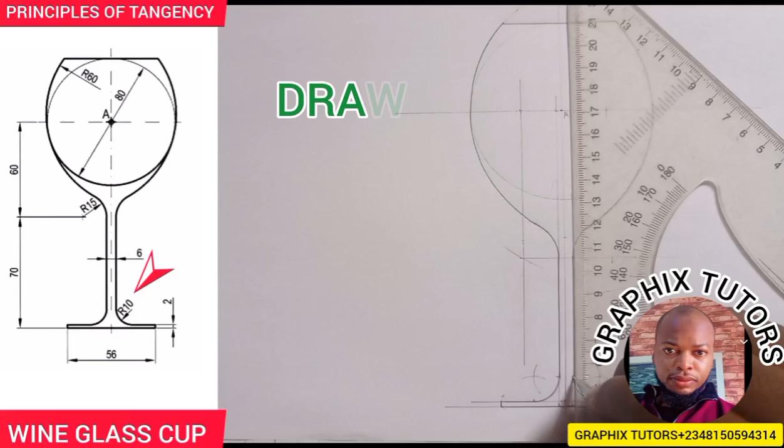If you look at the left hand side of the screen, you see a figure there, and that is a wine glass. We're told to reproduce this given figure using the principles of tangency. So first of all, I'll locate a center that is very visible, and the center I'm seeing there is center A.

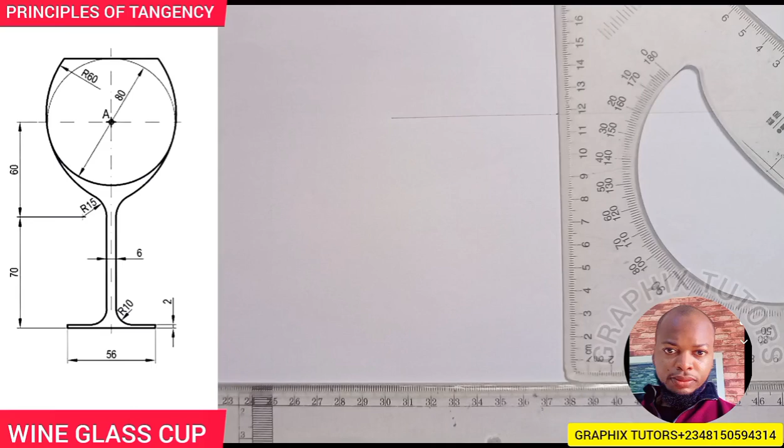So what I'll do is draw my horizontal line this way, and also draw my vertical line this way. Let me take it downward finally. Now this is where my point A will be.

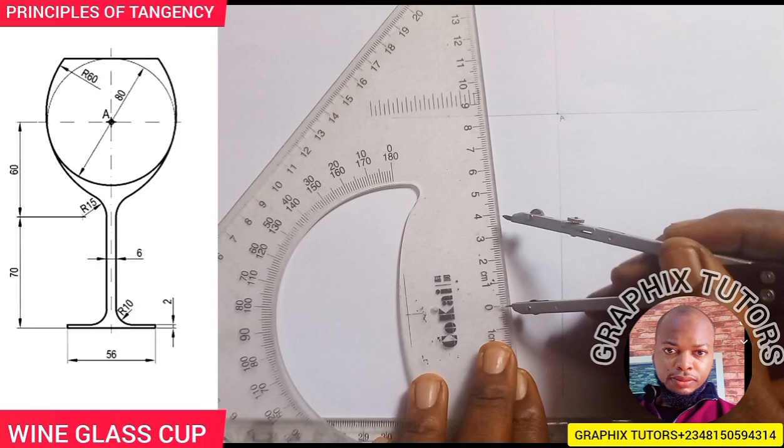Now the diameter of that circle my arrow is pointing to is given to be 80. So I'll use the radius, which is half of the diameter, and that is 40. I'm going to place it on point A, then draw a circle, as a point line first, so it will be easily visible for you to see.

The next thing we're going to do here is the other arc, tangential to the side of the circle my arrow is touching. This arc has a radius of 60. So I'm going to measure 60 on my meter rule: 0 to 6 is 60.

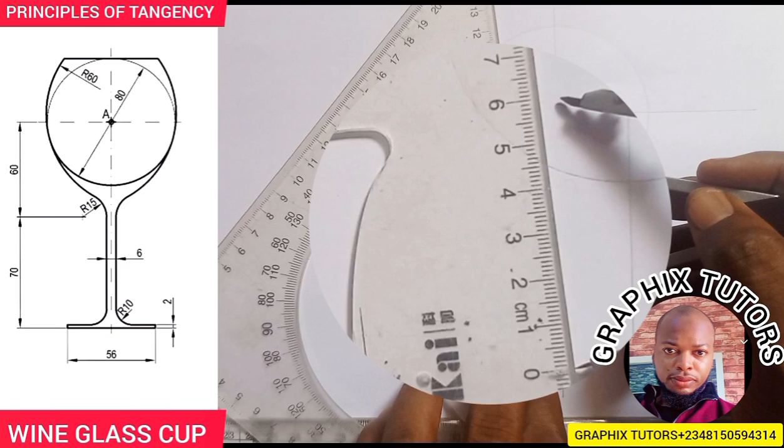I'll place it at this point, where it's tangential here, then strike an arc. So where I strike the arc, I'll take it back to that point. Then I'm going to draw my semi and then my arc this way, touching this way. I'll come here also.

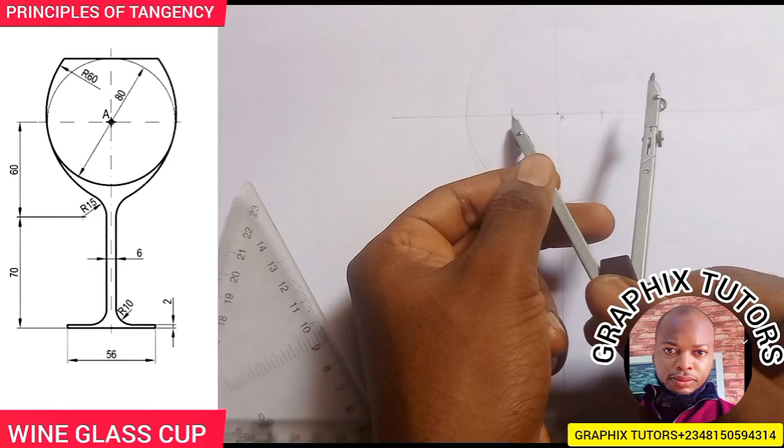I'll do the same thing from this point. I'll mark here, take my compass at that point with the same radius, since it is symmetrical. Then I'll do the same thing too.

Now what I will do next is close the top of it, since it is closed, tangential. From here I'll thicken it.

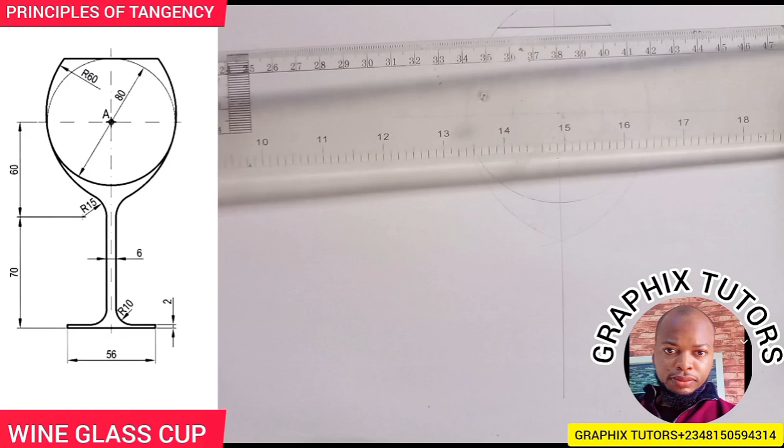If you look closely, there's a thickness of 6 millimeters displayed here between the base of the leg of the wine glass. So what I would also do is, from this point here straight down is given to be 130, which is 60 plus 70.

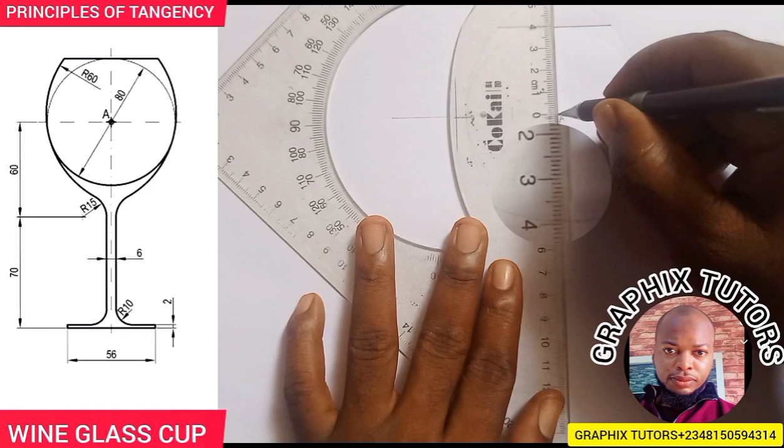So I'm going to measure 130 from that point. From 0 here to 130. At this point, I'm going to now draw my horizontal line there. That's the lowest point there, and I'll bring this to touch it too.

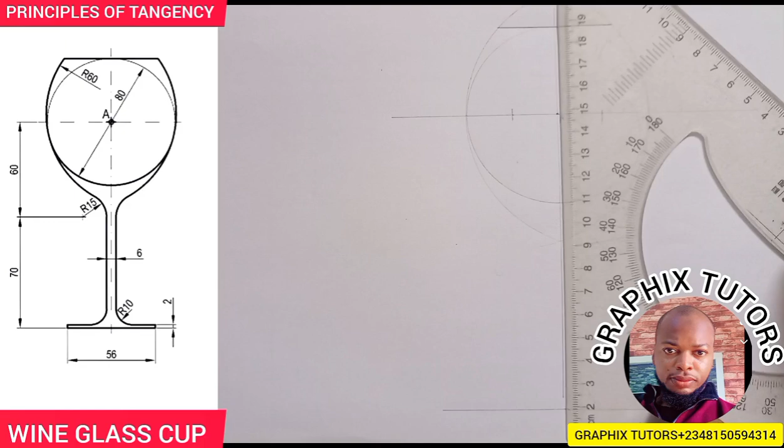From that point, I'll now measure a thickness of 3 at both sides. So this is 0, then 0, 1, 2, 3 at this point, and 0, 1, 2, 3 at this point, altogether making 6. So I'm going to project it upward in this manner, using a faint line.

Now the next thing is where this line is meeting, at this point here. Since that arc you're seeing is going in, it means the circle is external. So I'm going to add the radiuses: the radius of this, which is 60, plus the radius of this, which is 15. So 60 plus 15, that will give us what?

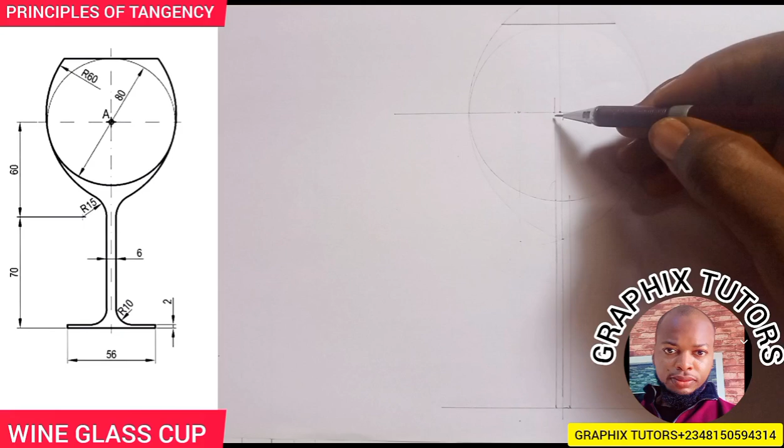75. That's 60 plus what? Plus 15 will give us 75. So what I'm going to do first is, after you've drawn this line, where the line intersects here, you now measure a radius of what? Radius of 15.

As you can see, that radius of 15 you're going to measure it, right? So this is 15 here. Then you drag it down. You drag it down in this fashion.

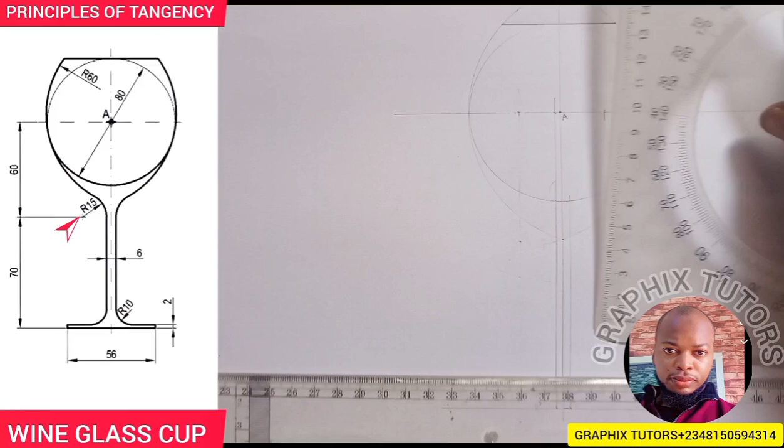Now remember that this arc you see, this is the center of the arc, because from here we got this, right? And you add that arc. Since that arc, this one here, is going in, so you add 15 plus 60, and that'll give us what? 75.

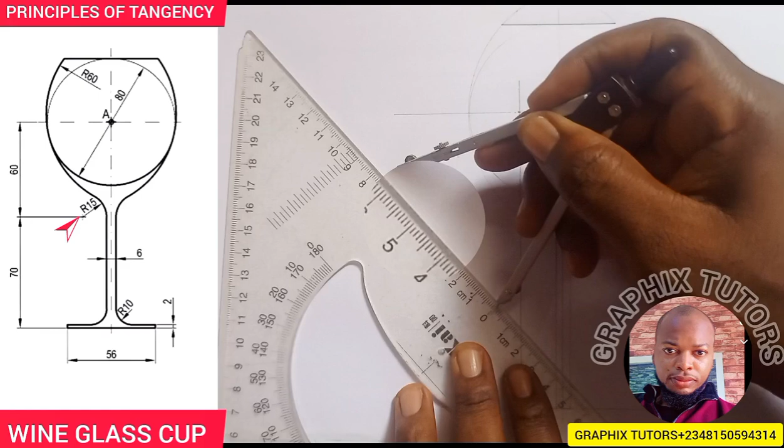So if I measure 75 on my meter rule, 0 to 75 here, right? I'll come to this center here. I'm going to strike an arc, so the arc is meeting at this point here. So it's from this arc I am going to get the fillet that will connect these two together.

You have to be very careful. Can you see that? So I'm going to thicken it out now, so you see what I'm talking about. Can you see that? Now it's remaining the other one.

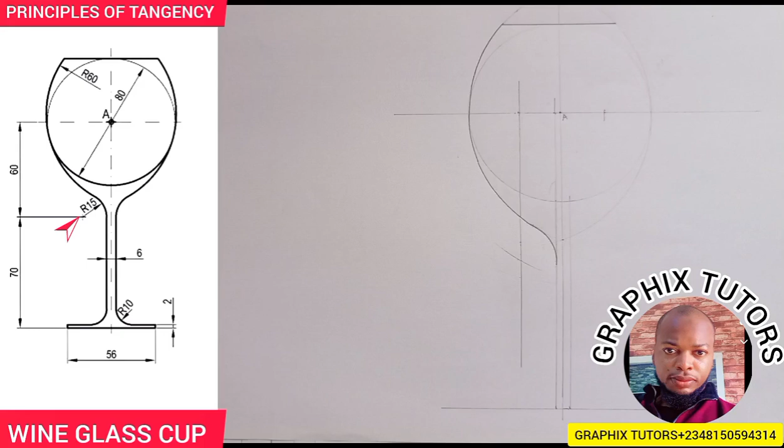So what I'll simply do here, I can just take my instrument here, then I'll just strike an arc here, place it from this point to this point, come here and mark here. So it's from this point you're going to get this arc.

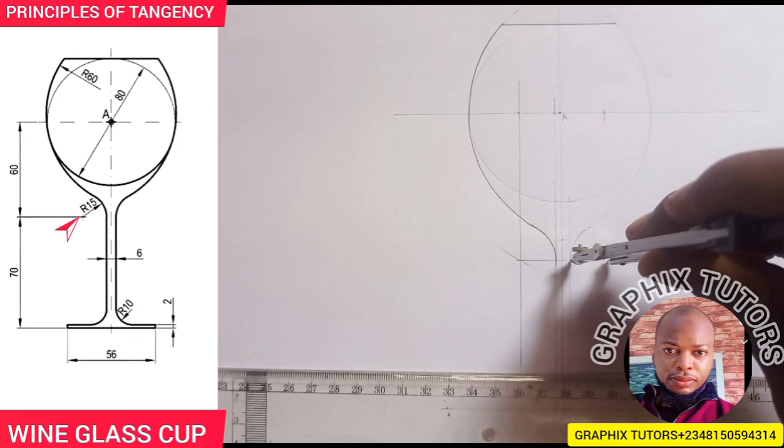Now you will now thicken from here to here also. Now you've done that. Now the next one is the thickness here. You can see it's given to be 2 millimeters. So you just measure 2 millimeters from here, from 0 to 2 here.

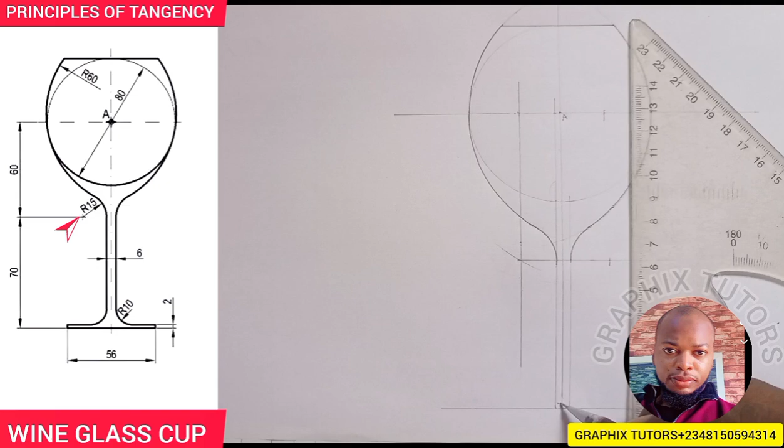Can you see that? This is 0 to 2. And you draw your horizontal line across that point. Then aside that, the length here is given to be 56. So I'm going to measure 56, that is 28 to both sides from this center line here.

So 0, 28, 0, 28. Can you see that? And I'm going to close it up. Close it up. Yeah, close it down here up to.

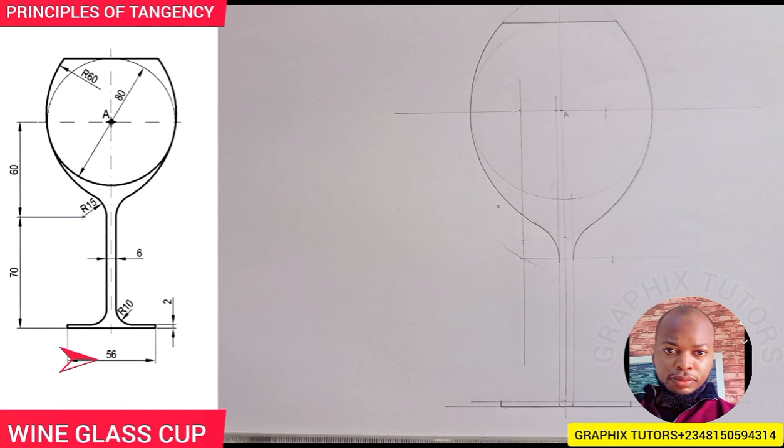Can you see that? This remaining here, the radius there is given to be 10, right? So I'm going to measure the radius of 10 on my meter rule to 10.

Then I'll come to this point where the vertical intersects the horizontal. I'll place it this way. I'll strike an arc here and here. I'll come here also to the other point where they intersect too. I'll strike up and down. I'm doing them simultaneously. So I'll now come here.

I'll strike an arc. I'll come here too, I'll strike another arc. So where they meet will give me my fillet.

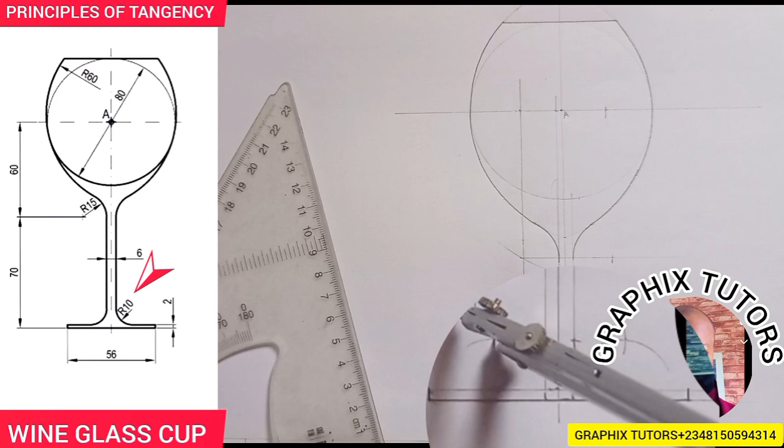Can you see that? I'll come here too. I'll do the same thing. I'll place it here, I'll strike an arc. I'll come here also, I'll place it here, I'll strike another arc. So where they meet, I'm going to have my fillet also.

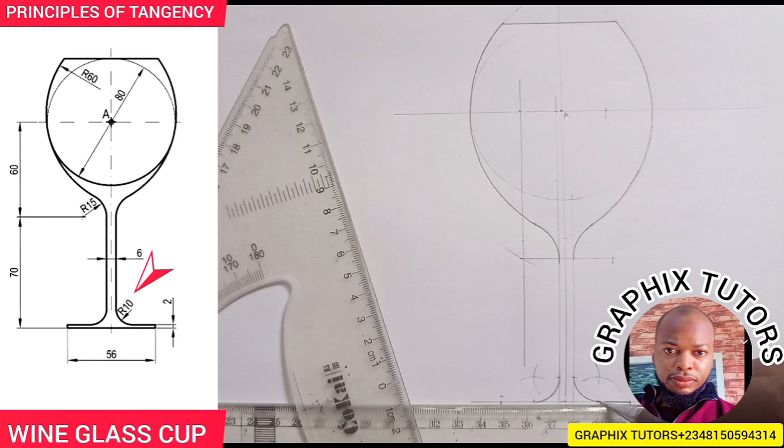Let me make that more glaring. So let me take them out. So from here, I have this, and here too, then here also, and here also.

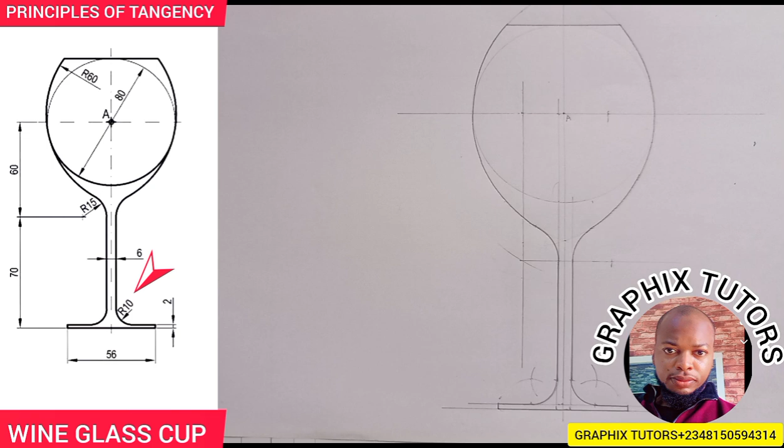Hope you can see that. So this is my wine cup that I have reproduced using the principle of what? Tangency. So you know that the radius from here.